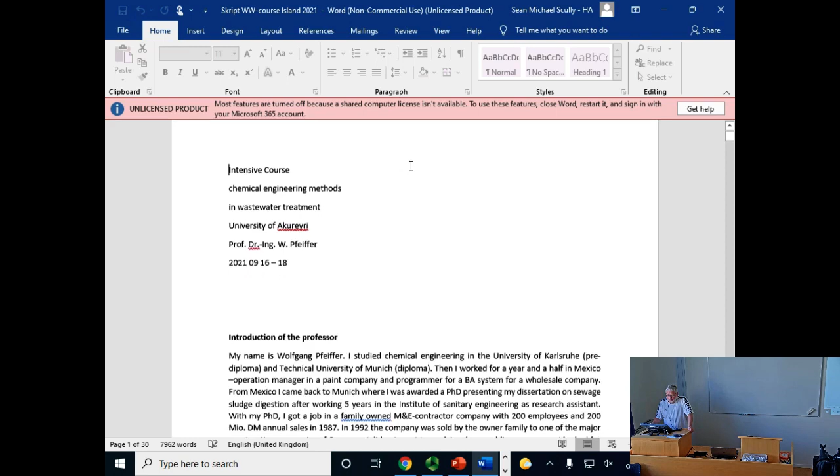Ladies and gentlemen, then I'd like to welcome you to the intensive course on wastewater and wastewater treatment and the connection to chemical engineering.

My name is Wolfgang Pfeiffer. I studied chemical engineering in the University of Karlsruhe. There I made my pre-diploma, and then I finished my undergraduate studies at the Technical University in Munich, where I made my diploma.

After that, I worked a year and a half in Mexico. I did different things there. I was operation manager in a paint company and later programmer for a business administration system for a small wholesale company that managed a wide variety of products.

That was still the time when you chased every byte, and you had to point your pointer on the screen and direct it all. A 5 megabyte fixed disk was our big pride, and it was a 100K central CPU, and 4 people could work on it, and it was only Business Basic. It was long before Windows was invented, so that was a totally different time, back in the 1980s.

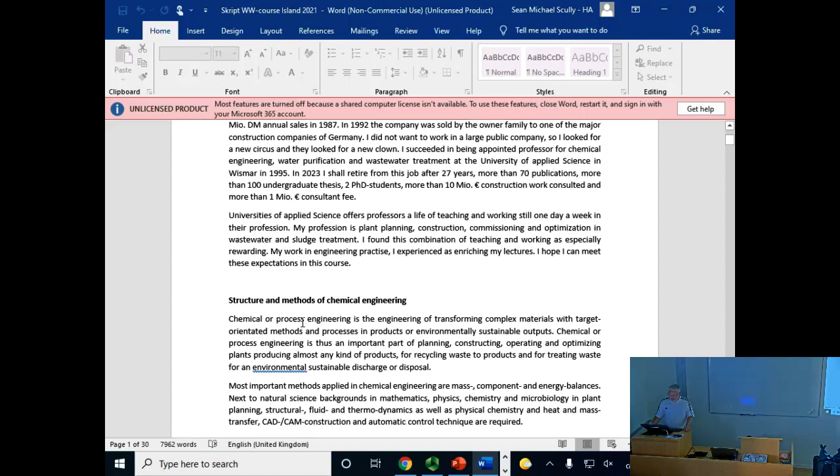So let me just try to change to the other file. Yeah, I guess it works easy.

Text is in German. I'm going to present you 2 or 3 different projects I did. The first one has to deal with a hair cosmetics producer. It was a company Goldwell, which then was bought by the Japanese company Kao.

And that was done still when I was working at the M&E contractor close to Frankfurt. Then I will talk about the development of a very small and very cost-effective DAF, as a pressure DAF, dissolved air flotation plant. I will present that, and last but not least, I will present a project of planning and then constructing a biological treatment of wastewater from a milk company with an SBR process.

So here you see the wastewater from the hair cosmetic company, and here you see the effluent, and in the back you see the solid waste from the filter press, what we saved. But you'll see this in a better picture later.

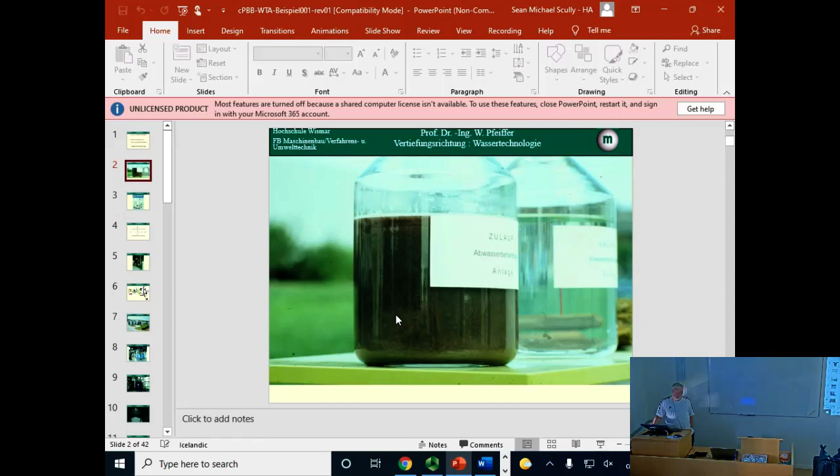We couldn't reach that with DAF, so we had to think something up. And just for playing around, because when you recall and you see this, you would not expect to get anything done with UV light treating this wastewater, which is thick in solids and color. So UV light is not going to penetrate very much through this wastewater.

So just playing around, we used this unit, and my chemist in my laboratory developed this process. He said, yes, if you treat this for 3 hours, you get a result. And the color is changed to a sand color, it gets a lot lighter, and the smell changes. I don't know what happens, but something happens.

And then after 3 hours, if I treat it conventionally with ferric chloride solution, lime, and flocculant, I get clear water, and the sludge I get looks pretty nice.

So I said, okay, try this on 10 different wastewaters, because in an industrial company producing hair cosmetics, shampoo, hair fixer, and all kinds of different products, they wouldn't give us the recipes - that was their production secret. And even if they gave it to me, they work with more than 200 different chemicals. So what knowledge does it give me if they give me a list of 200 chemicals in all kinds of combinations? What can I deduce from that?

I can deduce nothing. So this is one of the bases of chemical engineering - it's a very experimentally oriented engineering science. You just have to experiment. You don't really know what happened, but you see if different combinations work, and sometimes you have to say, okay, we found a way. We don't even know if it can be scaled up, and the upscale is really the core job of a chemical engineer. That's what I studied, and that's what I did all my life, more or less.

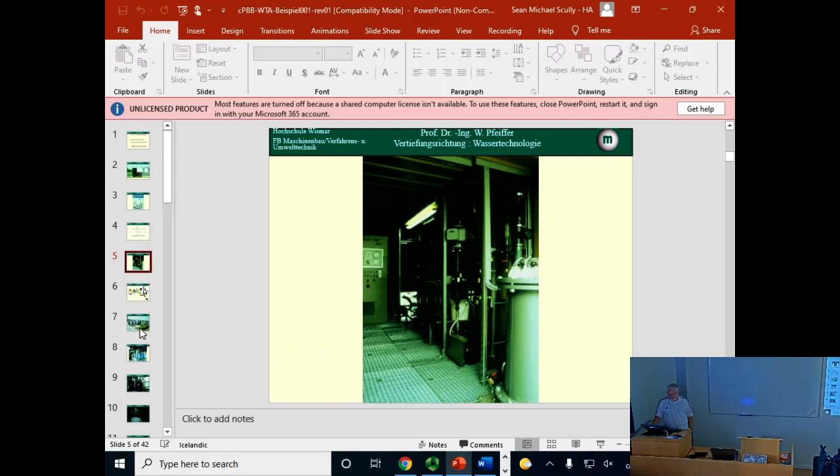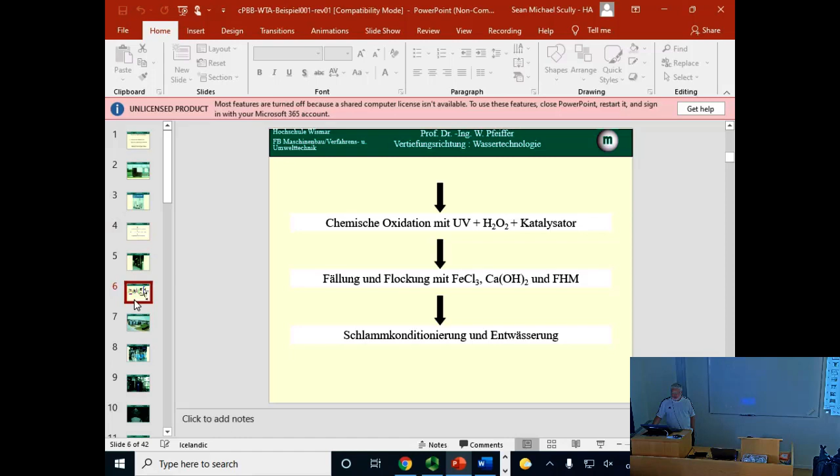Well, if you do that to a plant, you have to say, well, the wastewater comes, normally I have to store it. So what kind of process do you have? Do you have a continuous process? Do you have a semi-continuous process? Do you have a batch process? Well, due to that, we didn't really know how this central unit worked.

We decided for a semi-continuous process. So we would always have an alternating equalization tank. One day we would fill one tank, the next day we would empty it by treating it through the plant, and fill the other tank - alternating every day one tank, because this had to do with the dosing.

The pH, and what catalyst and how much catalyst we could try in the first batches, and whenever it ran, we knew that for this tank, this was the recipe for dosing the chemicals, the pH, and the amount of hydrogen peroxide. Then the plant could run all day and all night and finish up the wastewater of this tank. Next morning you had to see if it was the same.

Later it turned out, because the more experience you gained with the process, we had pretty much standard programs, and only a few days there were problems and you had to change the dosage.

After this radical oxidation process, we had this flocculant tank. We had 4 streets of this in parallel, 2 lanes of flocculation tanks. After the flocculation, sometimes the sludge floated, sometimes it sedimented. So we put a sensor for turbidity - whenever it was turbid, it would go to the sludge treatment; whenever it was transparent, it would go to a final filtration to get out the few flocks still in there, and then it was discharged.

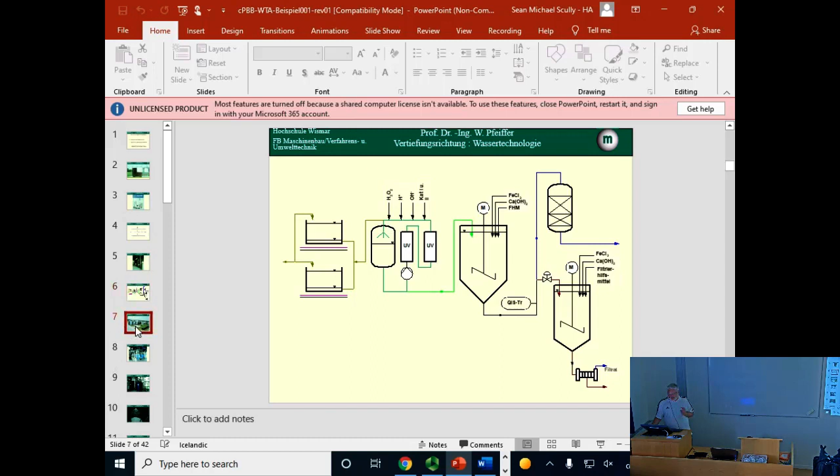There's a lot of history about what happens when you build such a plant. One day, they were already constructing it - the civil construction was all done, and they were just putting all the housings in. Then we made a last test, and we ended up purely in foam. It just foamed, and we couldn't control the process anymore.

So we tried and we tried for two weeks, and we were just standing in foam. We went back to the lab scale.

Also, when we started to get from the bench scale into the pilot scale, my chemist from the laboratory came back and said the process doesn't work. We tried 100 liters or 300 liters, and after 5 hours we didn't see any difference with this oxidation process. So finally I had to spend a weekend in the company, because they were so frustrated they wouldn't go back next Monday.

So I went there and said, you have to get something done over the weekend. I started, because they refused to start with only 50 liters. They're just playing around in the kindergarten, because the process will never be feasible then.

So I went there. I started with 50 liters, and I got it, and something happened. 50 liters was already a scale-up factor of 20 more—20 times the wastewater on the UV light in comparison to what we did in the lab scale. So that was a pretty nice factor.

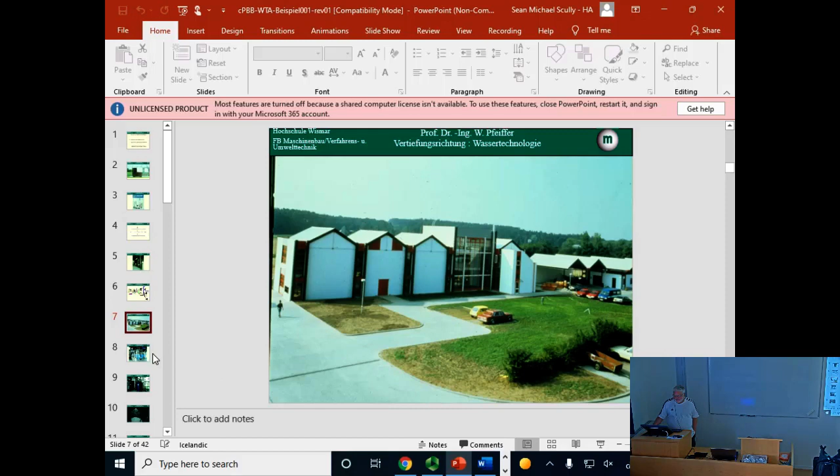Because in the real wastewater, you have some solids, you have some hairs, you have everything. So you have to have filters and pumps, and then you have to control the filters with pressure loss, differential pressure controls, and so on. That makes the plant a little bit more complicated. So the P&I scheme at the end was 8 DIN A0 pages for the entire plant. So there was built a lot of stuff, no.

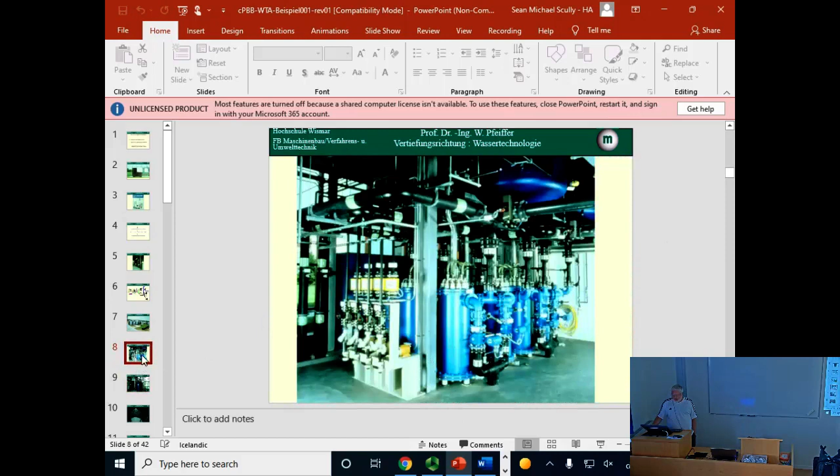This is the reactors now on the first floor. Below the reactors are the UV reactors. Then you have here - we had to spray it because this is how we control the foam, because when you start the reaction of course it foams, so just by simply showering we were able to control it. The reactor had of course a 5 cubic meter volume, so it had about 2 cubic meters for foam.

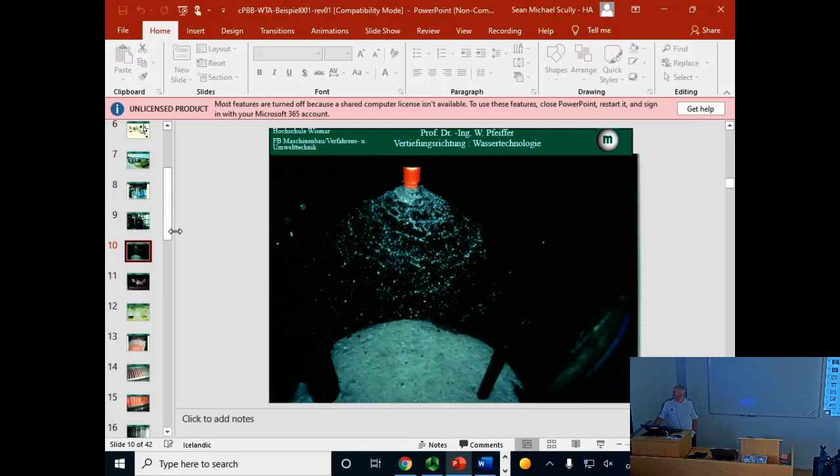Okay, this is now ground floor, sorry. This is the ground floor. You see back here the reactors. This was for lime, making the lime milk station, which is also something a little bit complicated. This was ash from an incineration plant for giving the sludge a better structure. And the sludge really was used in a brick company for making clay bricks.

This is where the sludge conditioning was. This was where the sedimentation was. Above where I'm standing here and making the picture is the filter press, and behind me is just the different storage tanks for the chemicals - for ferrous chloride, for hydrochloric acid, sodium hydroxide solution, and of course our nice little 30 cubic meter tank for hydrogen peroxide.

That's temperature controlled, and the temperature control has a direct connection to the fire brigade department. So if that heats up, then they all come. Unfortunately, it never happened, as far as I know.

This is a control room, and then it's a social building here. This floor actually had a price of 800 German marks per square meter. The Hyatt Hotel was built at the same time. They had only a floor for 750 German marks per square meter.

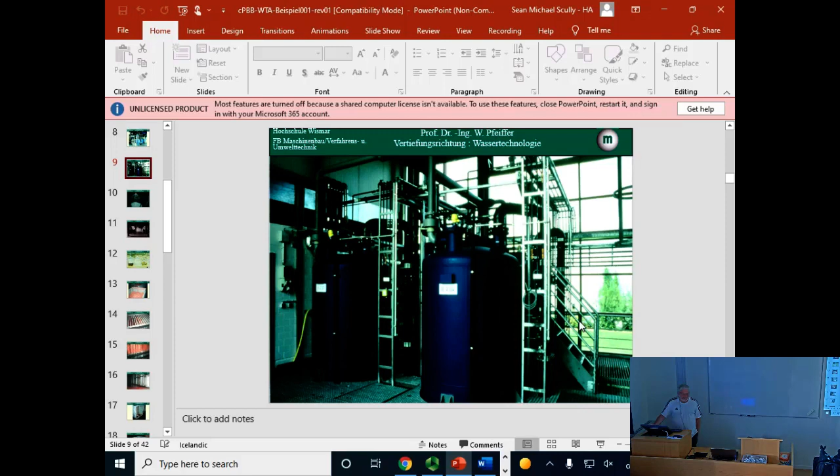Okay, and this was at the end. This is wastewater, this is water. It doesn't only look clear - it has a COD of, I think, 200 or 300, and the fats, also soluble fats, were below 60. And this is a sludge cake that went to the brick company.

It was okay from operation cost. Investment was high. I think they - I don't know what they did, but I think they are not using it anymore. They stopped it after 20 years. They changed.

I don't know, I haven't been there. My son is now studying in Darmstadt. I've been in Darmstadt 2 times, but I have not made it out to the company. I kind of want to look at what is with the plant, if it still exists or not.

Okay, the second one is for pet food pre-products. This is basically meat that comes out of slaughterhouses or packing houses, and this is meat that is good for human consumption, as you could sell it, but you can't sell it because no one is going to buy it.

No, it's intestines, sorry. Is this what we would call pink slime in the U.S., like the scraps off the bone that you treat with hydroxide? That kind of stuff? No, not really. It's good, you can sell it.

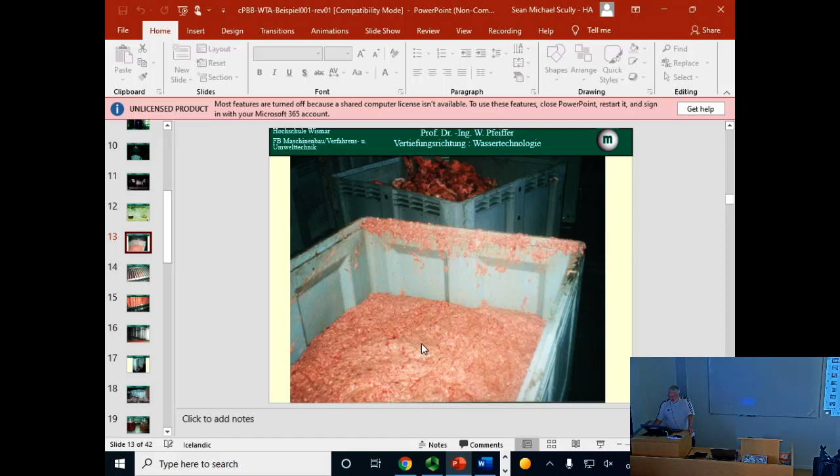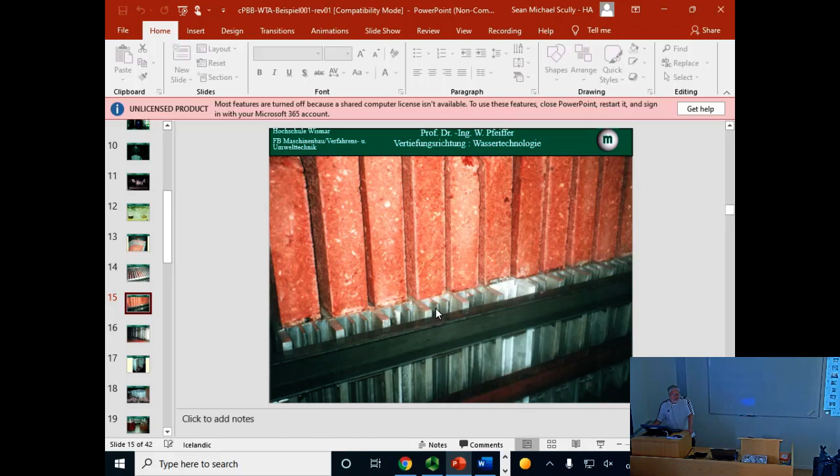Well, probably things have to change anyway. This might even become a prized product. Later they freeze it, and these frozen plates they send to the pet food companies. And they just can it up and sell it.

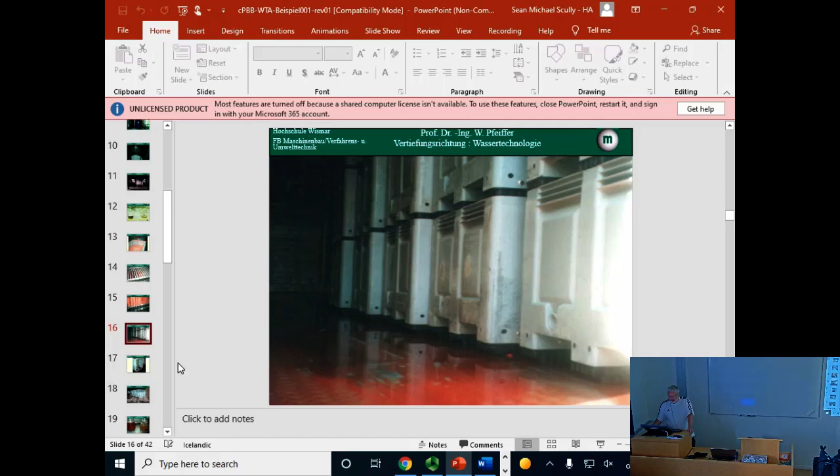And when the stuff from the slaughterhouse comes in the truck, you of course have here blood water, and when you have those boxes you have to clean, and sometimes from chicken stuff, or they sometimes get sent here fish stuff too, because they also make coats for nerds.

With COVID they had to kill all the minks in Denmark. It's those little animals, minks, yeah. Okay, sorry, minks, you're right.

This guy who operated this plant used to have mink farms also, and he said you can see everything of the process here. When I asked him, he said there are just 5 or 6 producers of that kind of stuff, and Chappie and all those big companies are not going to buy from anybody else because they trust their know-how.

Meanwhile, by operating biogas plants, I also learned that you have to add trace metals to a biogas plant if you operate it only on energy plants. In sewage sludge and in manure, you don't have any problems, you have all those trace elements. But if you work only with energy crops, you have a problem, you have to add that.

Also, which I was surprised by, when you work with food. As we built one biogas plant recently for a guy who cleans the inside of trucks which transport food on the road, no, milk, chocolate, oils, and all this kind of stuff. And they have to go to cleaning, they get cleaned, and the wastewater, he pre-cleans them.

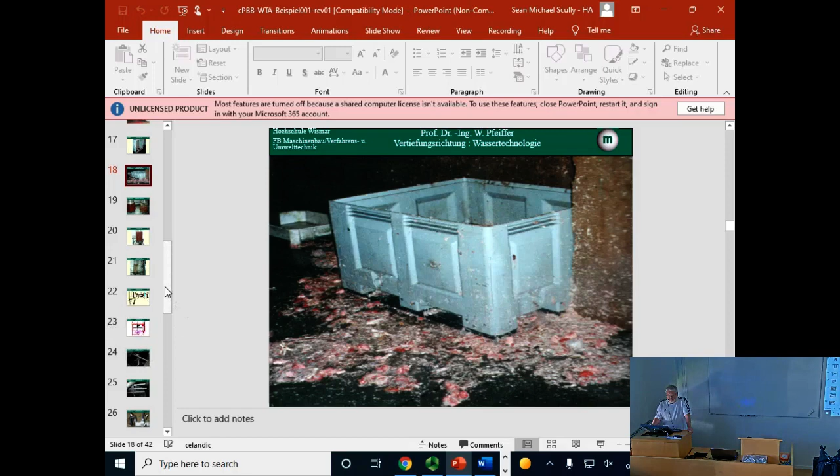And so they said they will only trust people that have experience with that. Just out of curiosity, with respect to the trace elements, do you guys happen to go to the bother of identifying which trace elements you actually need to add, or just perhaps throw the kitchen sink at it?

I know, sometimes it's good if you know someone who knows. And for me, it's Dr. Lindorfer, because he is from Austria and he made his PhD on trace elements. I have his PhD thesis, I looked into it, and he has found out what the limits are. He works for the Schaumann Company, which I think was founded in 1907 or whatsoever. They have over 100 years of experience, they sold this always to farmers, and now they are the leading one of 2 or 3 suppliers we have in Germany that send these micronutrients and trace element mixtures to biogas plants.

With him, I just suggest that to my clients, and that's it. So they have one source, they can buy it, and he helps me when I make my pilot studies and all this kind of stuff.

Okay, this is the wastewater that they have. And this is what it looks like after you add iron, because blood you can really flocculate very easily with iron salt and keep the pH around neutral. And then again I send a student there, because this is also an experiment that we show our students. This is our DAF unit.

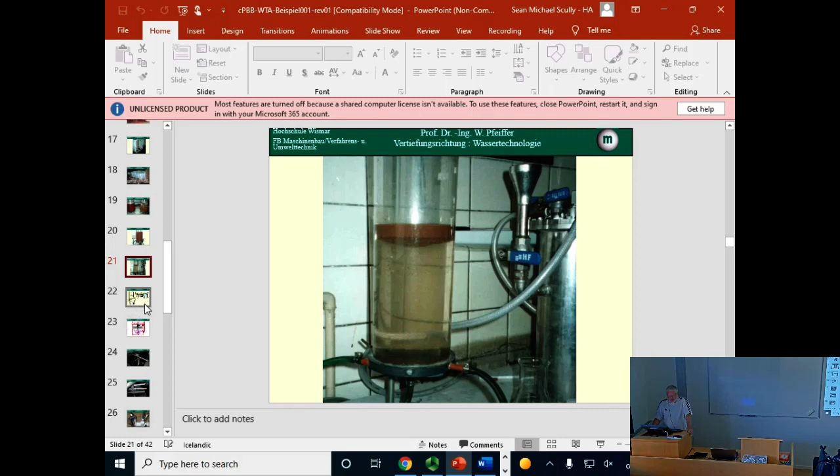Okay, this again is a process scheme, a little bit more now with elements. We have here an equalization tank with sedimentation of the coarse stuff. This is what you've seen here - you don't want to have this in your plant, so you just have it sedimented.

Then from here you have a pumping station. The pumping station goes into the big equalization tank because they only had 15 to 20 cubic meters a day, so they just run the plant for 4 hours a day. They do their day's work, and when they're done, they just press a button when the tank is a little bit filled - or it might even be automated so when it's filled it starts itself, and you can also start it manually when you finish your work to empty the tank for the next day.

Then you have an eccentric pump here, kind of a screw pump, a mono pump. That is for getting controlled flow, because the flow is proportional to the revolutions the pump has.

Then we add the ferric chloride, then we adjust the pH to neutral again, and then we add our flocculant in the flocculation tank. And from the flocculation tank, you go into this DAF unit, which I will describe a little bit because it's the heart of it.

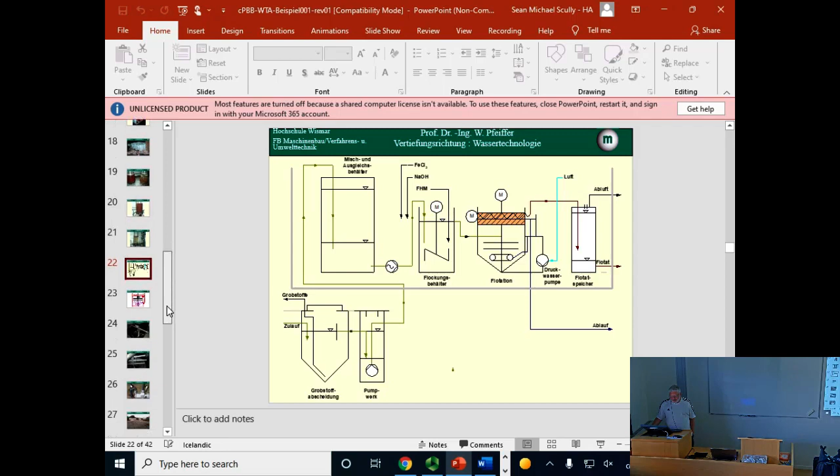So we started at the porch of my house. We started to make a float DAF because he has never seen a DAF. So we made a small DAF on the porch of my house with an IBC tank, playing around there, giving different ideas. And then I had a very good student. He did in his bachelor thesis, at that time still a diploma thesis, he had 3 different projects.

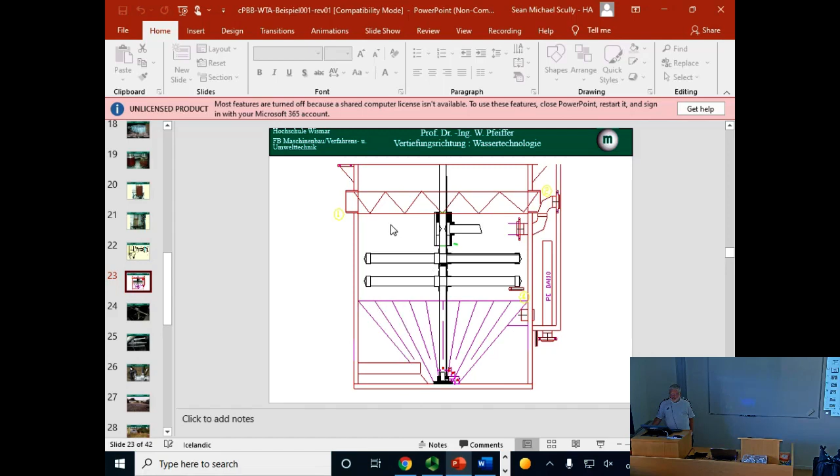One of them was to help us with this DAF unit. So what we did, we bought a PE plastic tank, already with a cone inside. That cost us, I think, €3,500. Wasn't really expensive, because it wasn't big. It was like 2 meters in diameter, 250 in height or something.

And then the real thing was how to get the sludge away. So we just put a screw, a conveyor screw, in a pipe, and we just opened the pipe on top of it. And then what we did, it was windshield wipers from trucks. We put this construction here that was turned around. There was just one motor on top of it, turning all this, what you see here in black, turning it around. And this was the inflow here, and we had also for static, and we had 2 holes here, so the inflow could always work in this little chamber.

This was isolated with O-rings. And then in this main column, we entered the wastewater here, and from the bottom, we entered through a block, and through the block, we pumped in the pressurized water, and the wastewater would go out here through these ones. They were a little bit at an angle, so the wastewater would be released first, and the pressure water would follow. So the pressure water would then go under the flocks, put the wastewater up here.

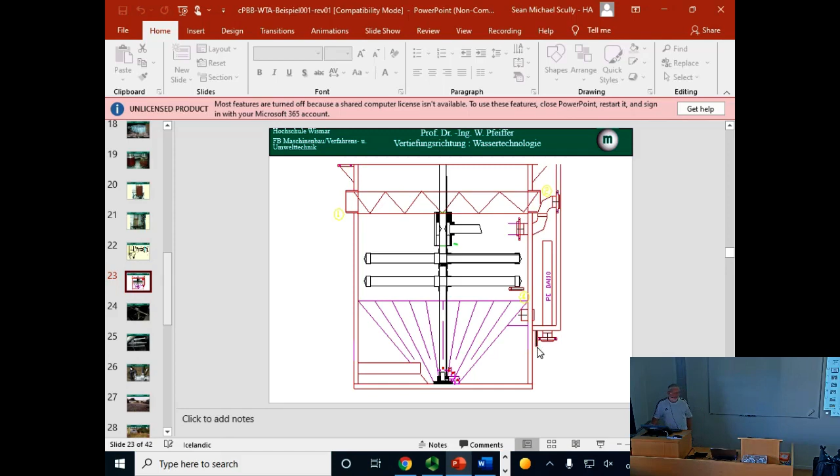And the wastewater would be collected underneath here, go into this chamber. And this chamber had an overflow where the effluent was, and this was the overflow here, and also from this small connection here was going to supply the pressurized water. Okay, now in concrete you see this here.

This was a construction. All this material is standard from a company called GF. It costs us, I think, €500. All this you can just... this is another. All the steel work and the motor is maybe €2,000, and this really was a little bit eccentric.

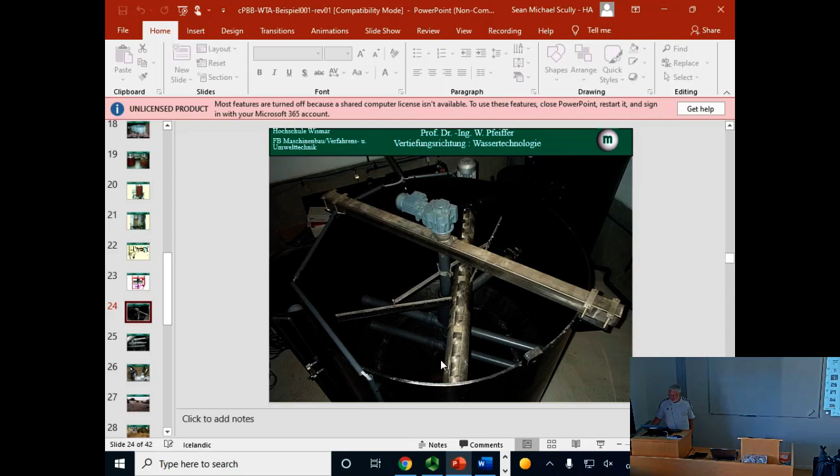These are the sludge collector, the conveyor, spiral, and this was the windshield wipers from the trucks. This would be turning around here. Here you see the 2 different distributors. Let me see if I have anything else here.

The hardest work was for the poor guy who had to weld all those half-cut plastic pipes here in this cone, because this is welding there, and sitting in a cone is not really very comfortable, to be honest. And this was the pressurized water going to the central block. This is where the inflow comes into this connector, and this was blind flanged here, so the water could just get out through those holes here, and the pressurized water would go out through these holes, which you see here.

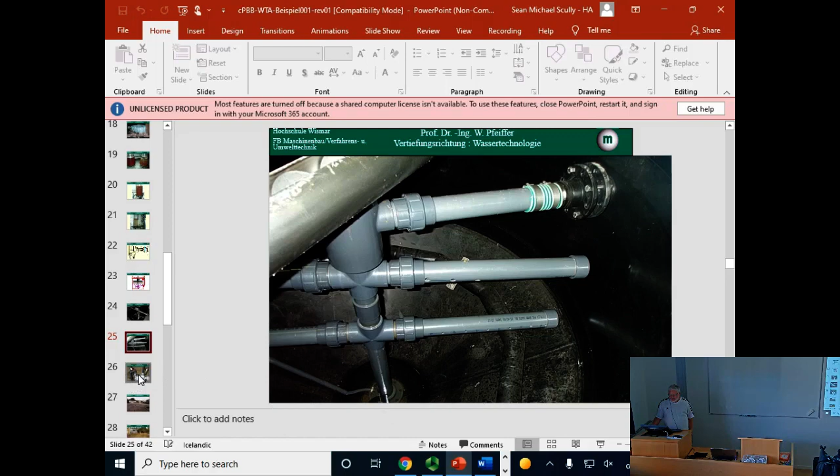So the whole thing did just cost €35,000, and the project was very profitable. Because the standard solution, what other suppliers offer, if you just buy the naked flotator or flotation equipment, you're at 150 to 180,000 euros, and to reduce that to 35, that left a little bit money for everybody.

This is a pump that is a 2-phase pump, and that is where you mix water and air and compress it to 4 bars. This is where the air is sucked in and the water comes. I don't really know, this might be the inflow, and this might be the air connection somewhere here. At least that's from Kiel and Edur pump.

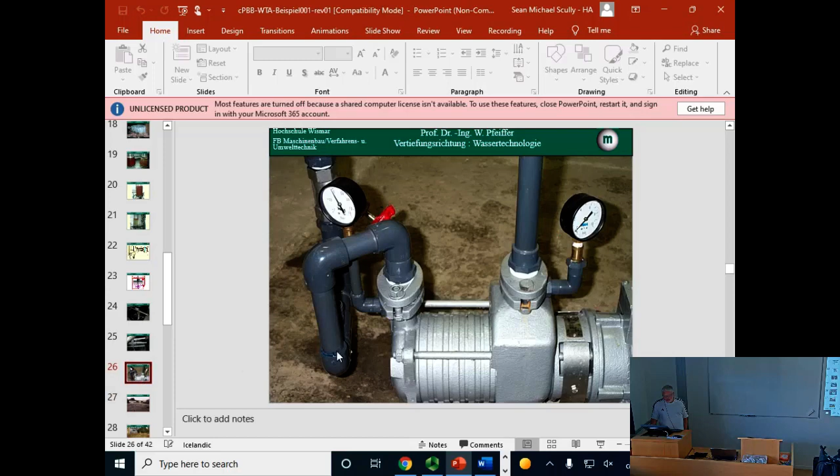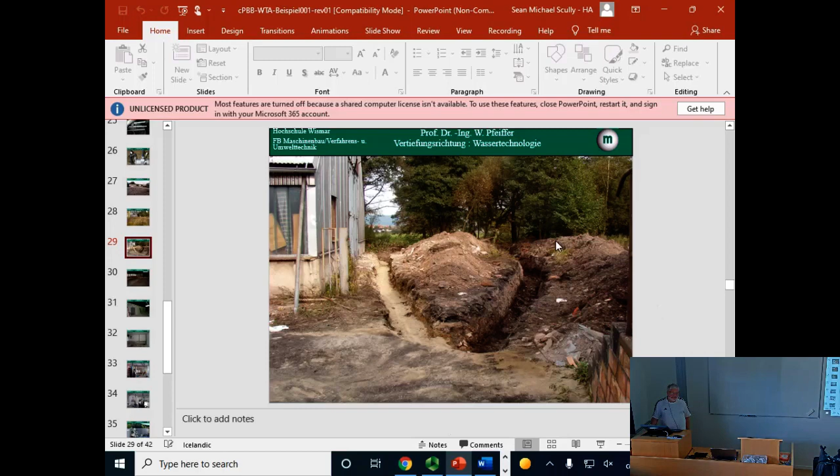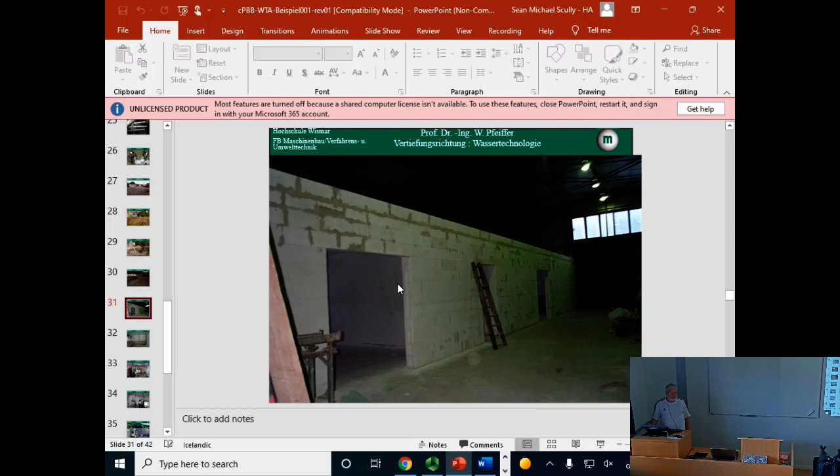Then you come into the building. There were milk cans here, so we cleaned out the milk cans, and I chose this to be my operation building. That was, of course, very cost effective - just putting in a few walls, putting a wooden roof on it, and putting the milk cans on top of the wooden roof, and everything was in order again.

Then we had here something I wouldn't ever do again: make underground constructions in an operation building. It's a little bit dangerous. Not really, because the volumes are very small, but you can generate explosive or toxic gases. It's better to make it outside. That wasn't really a good idea - probably one of the things I didn't do a very good job on here.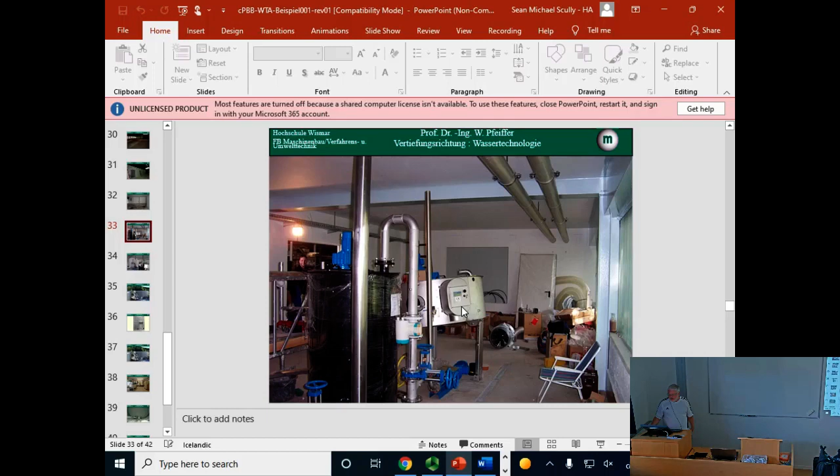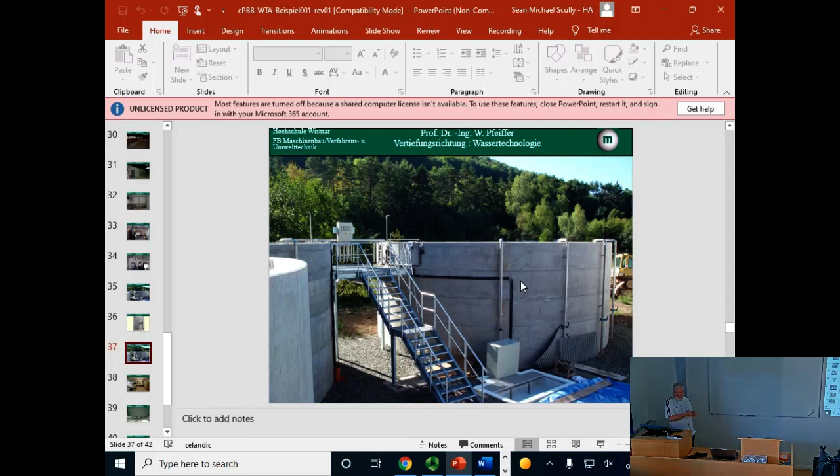These are the two SBR tanks. An SBR process has different phases - what we'll talk about on Friday: biophosphorus removal, denitrification, nitrification, and sedimentation for separating the activated sludge from the treated wastewater, all done in just one tank, on a time scale. You have two options: do it for each unit with a different tank, running time-wise in parallel but in different tanks, or do it all in one tank, separating it by time with different phases.

Okay, this is when it's fully equipped here. This is the influent, and it either goes to an equalization tank or to an emergency tank. And this is a pump that pumps it back from the emergency tank into the inflow.

Whenever the wastewater is getting a critical composition, pH, temperature, or concentration, then you can just pump it into an emergency tank, because if it has an unusual composition, something has happened - maybe they lost some acid or base, or a milk tank lost a couple cubic meters of milk or cream. Then you can store this in an emergency tank and pump it with a small pumping rate into the wastewater stream, especially if the wastewater is not very concentrated at that time. Then you can dispose of those hazardous wastewaters, because the components in there aren't different, it's just a concentration issue. If you have different components, of course, you have to think about different ways.

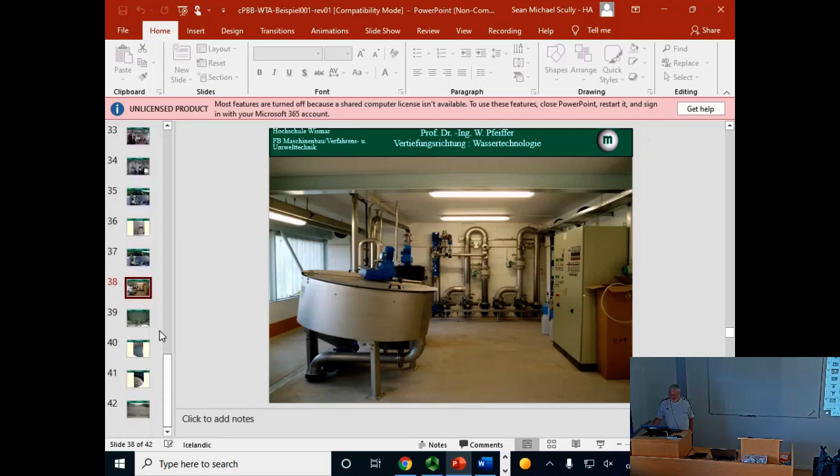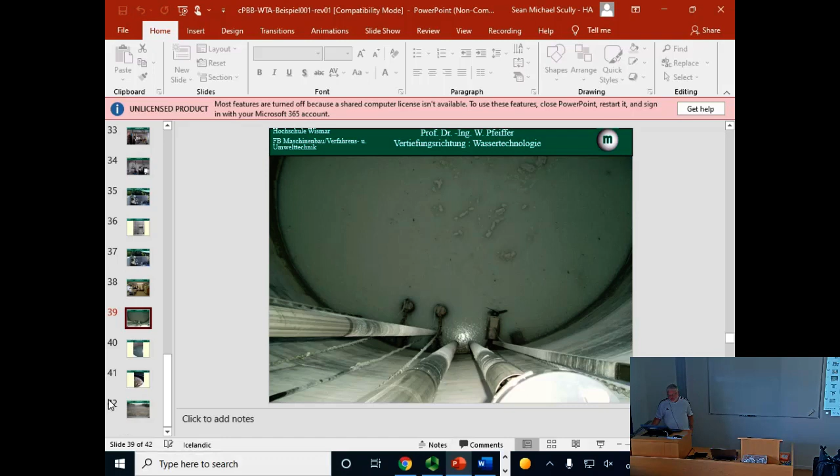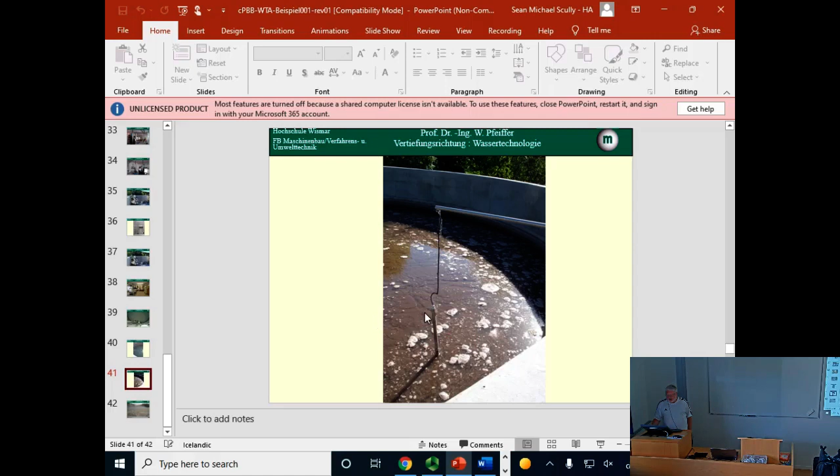This is an oxygen pH meter, because this is the equalization tank here, and this is the aeration tank where you see the activated sludge. This is the dissolved oxygen DO meter, dissolved oxygen concentrations. You see in those things that it's flocculating very well, because you see those clear water traces there - it separates nicely. This is when it's aerating in the aeration phase, with fine bubble aeration distributed over the ground floor.

That's a little introduction to what I've been doing. Lately we've had a couple of breweries we had to consult - nice job, we love that. I still have some jobs in the milk industry, right now mostly a Bavarian milk industry, working on their flotation sludge discharge.

We're going to build a 4.2 megawatt biogas plant there, to process their permeate, molasses from the lactose production side product, and flotation sludge - mostly to become independent of the waste disposal companies, because they just eat you up. They ask 55 euros per ton for flotation sludge, and right now we're hauling that to the next sewage treatment plant, paying 18 euros for transport, and we're finding a new transport for 11 euros.

So the entire cost goes down from 1.1 million a year, because it was 20,000 tons at that place, to maybe a couple hundred thousand. It's better giving the money to the farmers than to the solid waste disposal companies. And with this 4.2 megawatt plant, since right now all the steam furnaces run on natural gas, we can substitute almost 90% of the natural gas with biogas. That's also a contribution to climate protection, because we're talking about 700 cubic meters of biogas an hour - some tons of it. Okay, any questions about this?

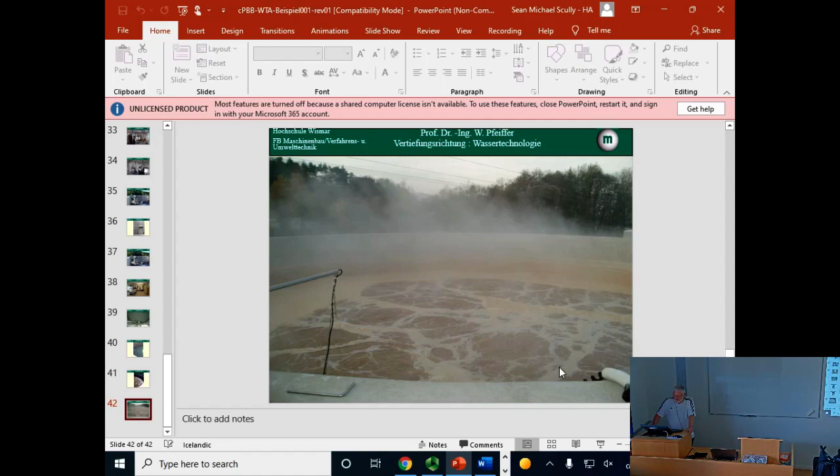Okay. Now this is...

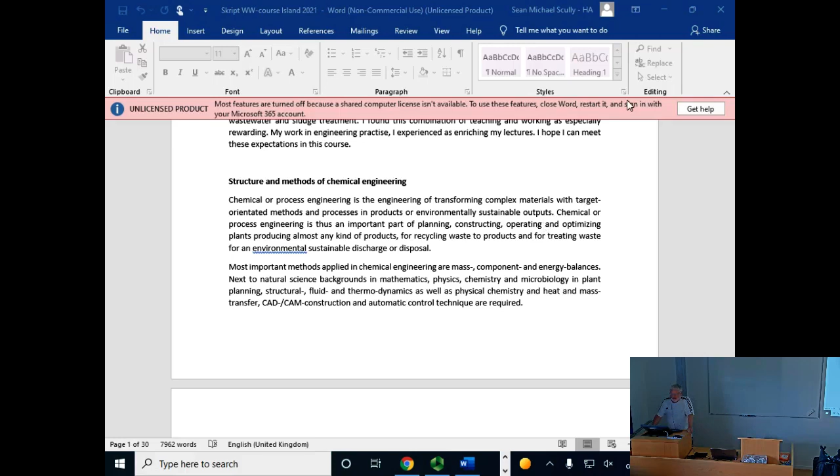Oh okay, so you might have read it. It's a little tricky because I didn't know what people I'd face here, and probably everybody here has nothing in mind but ending up on a wastewater treatment plant. If they would have told me that when I was a student, I'd have said you guys are crazy. Ending up at a wastewater treatment plant, I really find it challenging, because in the morning you're in a bakery company, at midday you might be in an automobile company, and at night, if you're lucky, you're in a brewery company doing your job there.

Because everybody is working with water, and if you work with water, you have wastewater. So it's probably the product that's moved more than anything else in all companies. There are only very few companies that move anything else, or any other chemical, more than water.

So it's really interesting for a process engineer to come to all those different companies which do different things, and they all have to disclose much of their production. That's kind of interesting, to see how they produce and what they produce, because normally they don't look at the wastewater.

I also once had to do something in a huge, pretty big bread company. They make about 9,000 tons of bread a month or something, for all of north Germany more or less. This is golden toast, and I think they do a lot of that stuff.

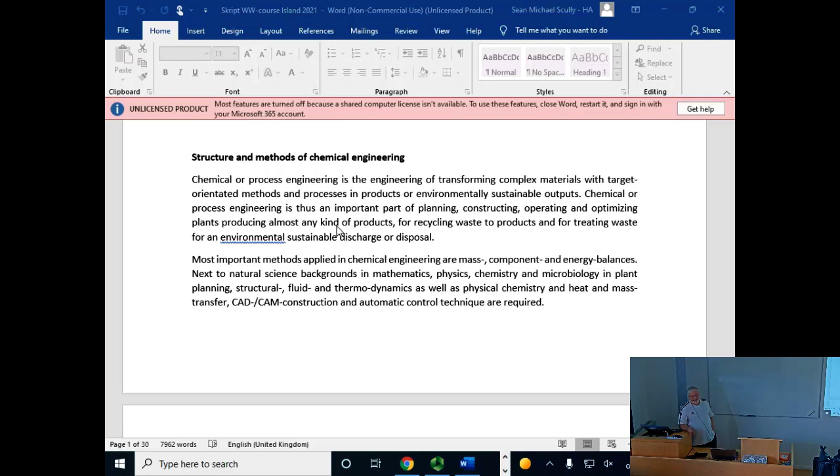And I swear I'm not going to ever put a foot in this wastewater treatment plant. They were a little bit surprised. No? And I said, 'Hey, I'm a professor. I'm not operating a sewage treatment plant. My laboratory is going to be on the sewage treatment plant because there I have every media I need to experiment, and there they take me seriously. I'm not going to operate here. In summer, no students. In winter, there I just get urine. I can't work here. No, that's nothing. Nothing. That's for playing around and not for serious people.' No, okay. My laboratory is on the sewage treatment plant.

Wasn't easy, no? Because they told me it wasn't possible, and I said, okay, we'll get it done. No? And nobody wanted it, but I had to talk to the prime minister of our state, and finally I got it done. With the help of a few other people that thought it was a good idea. But it wasn't easy, but finally we got it done, and I'm happy with it now. We moved one sedimentation tank a little bit closer together, so I got my 400 square meters for my laboratory.

Well, I lost a little bit the thread. Where did we get from? Bread, yeah. And this is why you have to look into the production, no? And you can save there just any amount of money, and why you have to look at this co-work of experimental work and design, no? That really makes it, no?

And the other one, then we in Grevesmühlen, where there was this manager of that utility company, he once got an approach. They wanted to make biodiesel out of the sewer waste fat from grease traps. And it ended up that most of the waste from the grease traps ended up for co-digestion. And those guys that wanted to make biodiesel, they got into jail because of subvention fraud, you know? Because they took money and they never really produced biodiesel. I don't know if it wasn't that bad, but they were pretty well fined, and they had to go in for a certain time.

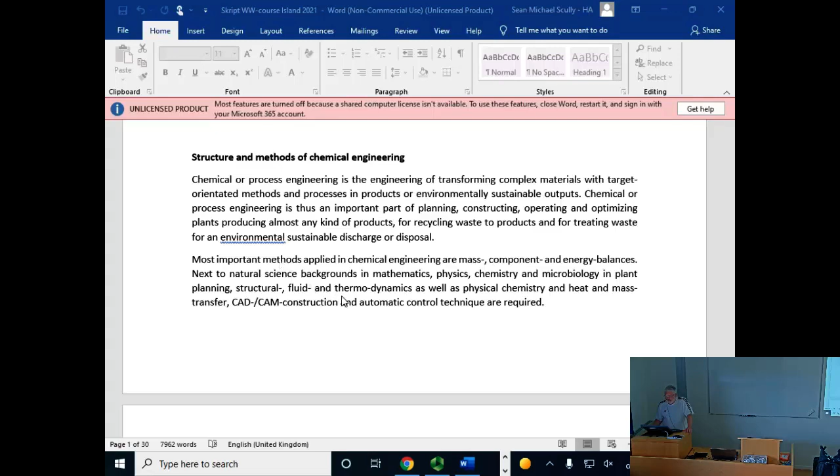Okay, now we shall move on to the world of process and plant engineering.

In Germany, we have almost a law called HOAI, the German word for Honorarordnung für Architekten und Ingenieure. Germans love the word Ordnung, that's regulation. Honorar means money, so it's a regulation for charging engineering and architectural services. This exists because public companies also have to give contracts to engineers and architects, and this regulates how they can pay them.

This is because at the time you give the contract, you don't even know what you will construct. You know you want to build a school, but you don't know how much it will cost or what it will look like. That's what this regulation is for. If it costs that much, normally you get anywhere between 10 and 15% of the total cost of the building, machinery and equipment. That's what you invest for planning.

This regulation also gives us a nice structure of how a consulting or planning process is organized. It's structured in 9 phases, and that's what we're going to follow here, though not through all 9 phases.

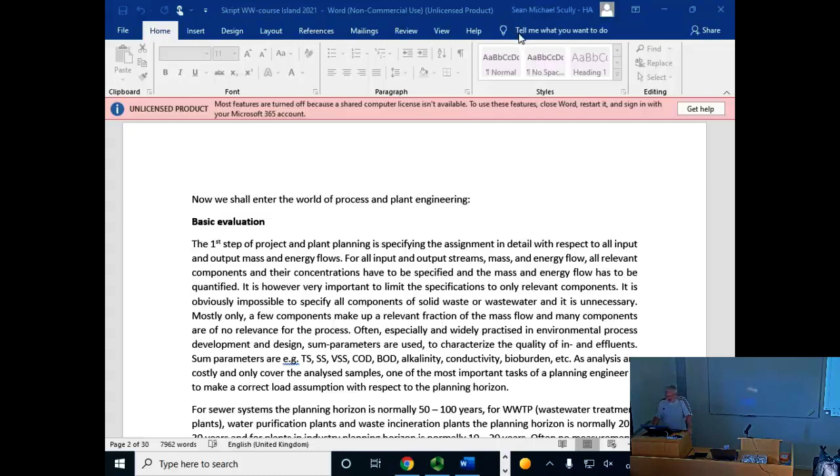So for sewer systems, I just said the planning horizon is 50 to 100 years. For wastewater treatment plants, water purification plants, and waste incineration plants, it's normally 20 to 30 years. For plants in industry, it's normally 10 to 20 years, although often they are deinstalled after a shorter period of time. Sometimes it lasts longer, so an average is maybe 10 to 20 years.

Often no measurement of the input loads is possible because you stand in front of a green field and can't measure anything there, since the plant is only being built, and at the same time you've got to build the wastewater treatment plant for it - simply because the data aren't available. The load assumptions are often the most insecure part of plant planning, especially in environmental plants like wastewater treatment plants or waste incineration plants.

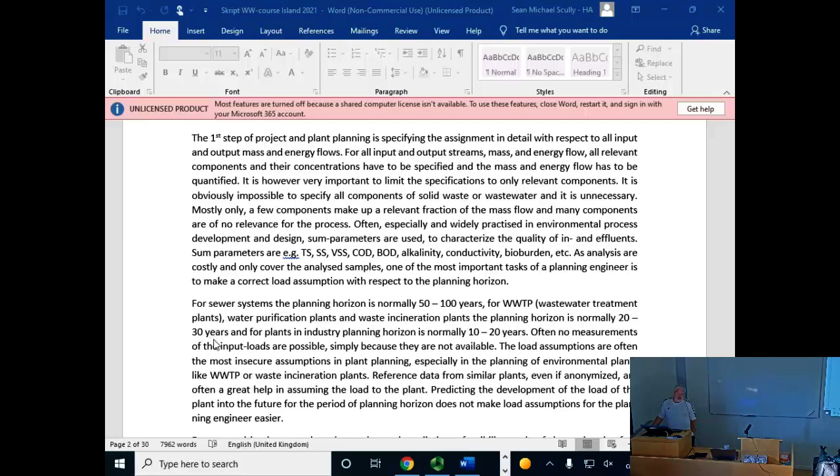Reference data from similar plants, even if anonymized, are often a great help in assuming the load for the plant. Predicting the development of the plant's load into the future, over the planning horizon, does not make load assumption any easier for planning engineers. So it's just difficult, and of course you have to discuss a lot with the people to find out what's possible. Since you're not in the bakery business, you've got to talk to the people - what do they expect?

What's safe? What's not safe? For a sound assumption, a thorough preliminary feasibility study of the project is often required. All stakeholders should be involved in the study and should agree to the result, which shall be the basis of the process development and design, if the draft process study proves the feasibility of the plant. Especially in planning environmental plants, it's most important to study thoroughly whether the load to the environmental plant can be avoided by optimization in the production processes. Because nobody can pay for a wastewater treatment plant to treat raw material - then you'd pay for the raw material three times: you pay for the raw material, pay for the treatment, and pay for the sludge treatment and disposal.

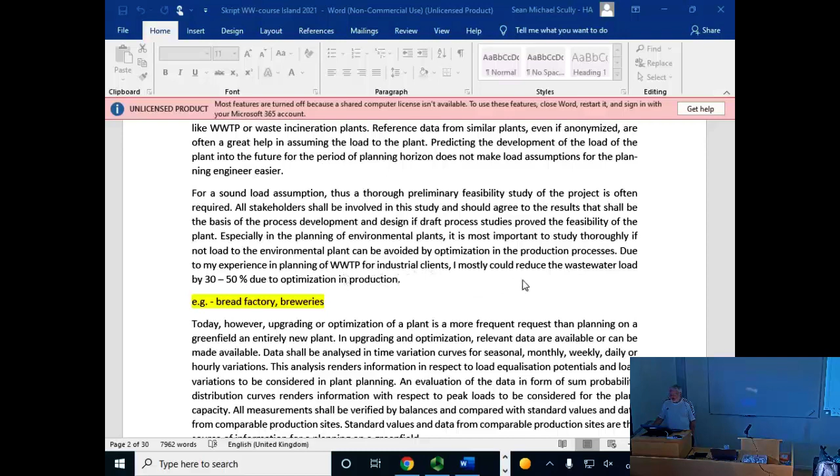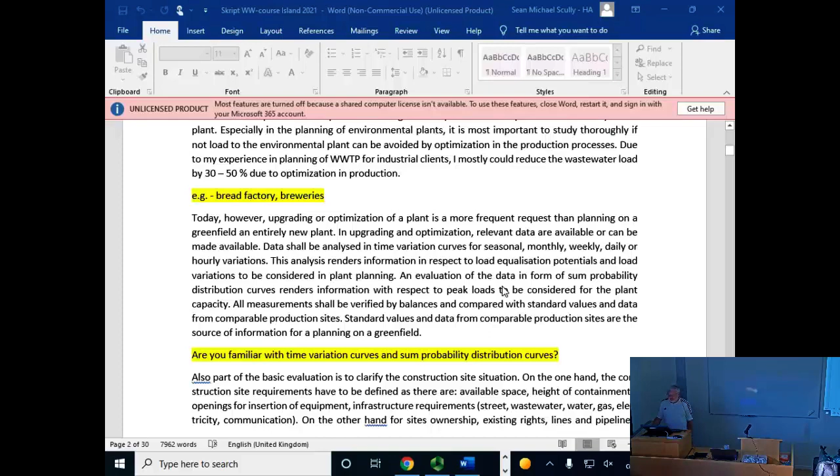No company is going to survive that. Due to my experience in planning wastewater treatment for industry, I mostly reduced the wastewater treatment load by 30 to 50% through optimization in production. That's normally what you find. I also told you about the bread and brewery examples I already mentioned - there's also an interesting approach - but now let's look at how to go about sizing, what to build.

When the people from Bayer bought a nearby biotech company, which I was involved in a little bit with wastewater problems, they said they're buying a new territory because they want to expand the production and R&D department. So they bought two lots next to the existing company, and we were doing all the planning of what we needed for expanding. We made a room book - what is in every room, how many rooms do we need, what size do those rooms have, what is the infrastructure, and so on.

Then the Bayer people came, looked at that and said, that's nice, but we're not interested in that right now. That comes later. What is allowed to construct on this lot? We are going to build what's allowed - 6 meters high, how close to the border can we get? That's the building we're going to construct. Then we're going to talk about what's inside.

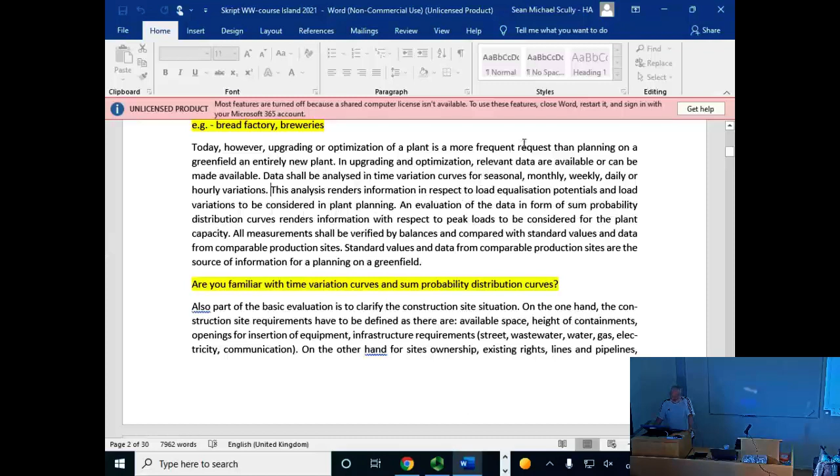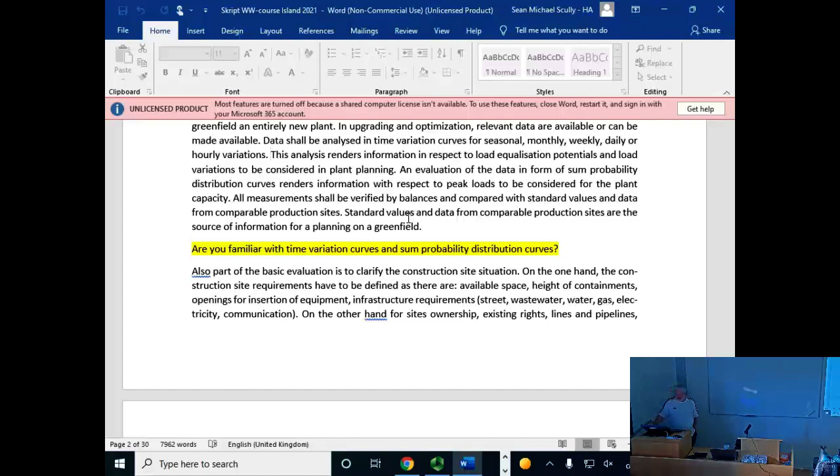Okay, now enough information generally on quantifying and specifying your assignment - what your job is, what you have to do, and how to qualify and quantify it by some parameters, data evaluation, time variation curves, and sum distribution curves.

Okay, the second part of basic evaluation is that you clarify the construction site situation. On the one hand, the construction site requirement has to be defined as available space, heights of the containment - that depends on your reactors - openings for insertion of equipment, infrastructure requirements: if you need a street, a train connection, a quay for ships, it depends.

Wastewater, water, gas, electricity, communication - you've got to find out if there are lines for these. So when the backhoe, the scoopy thing, the machine that digs up the earth, comes...

When he comes, you better know where the gas pipe is. Otherwise you're going to have a big hole and no backhoe, no construction machine anymore. The hole is there, but no construction machine anymore - you are in jail, because the operator doesn't exist anymore either. As with gas pipes, you better really know, and the same goes for not destroying existing pipes.

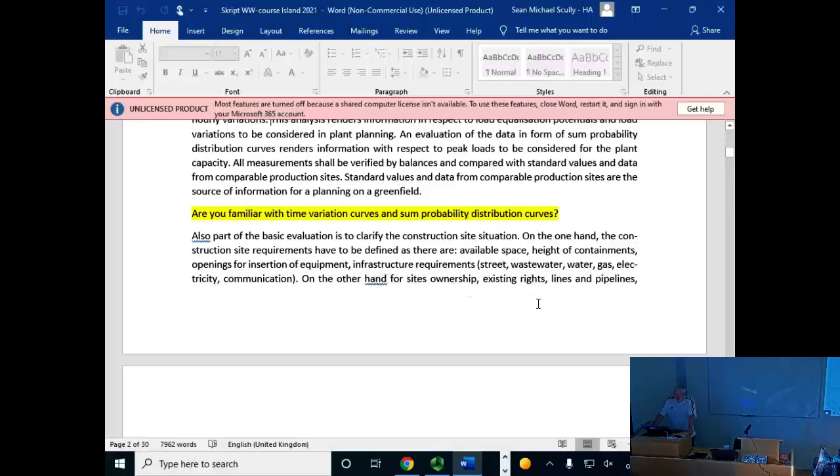On the other hand, for sites: ownership, existing rights of other people, lines, pipelines. Quality of building area, very explicit - the bearing capacity, what kind of foundation you need for construction, groundwater table, foundation requirements. This is all important.

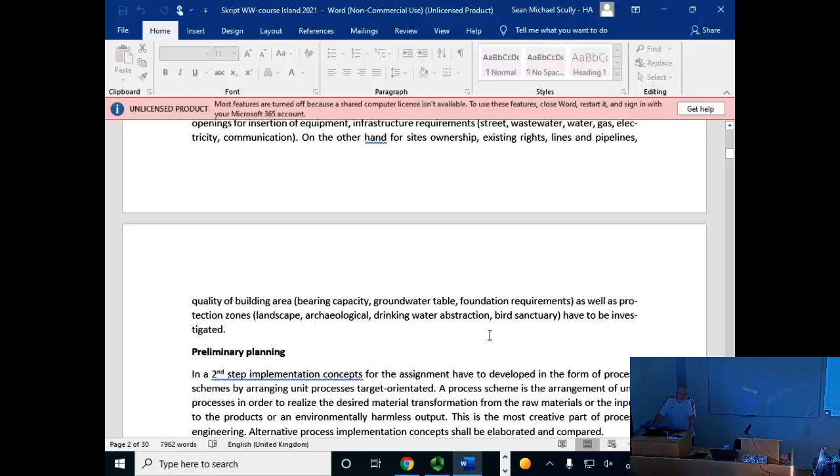This can considerably generate costs, as well as protection zones - landscape, archaeological, drinking water abstraction areas, sanctuaries, and everything else. Because you might plan it, but it doesn't help if you don't get permission later to construct it. Okay, that's all for basic evaluation, if there are no questions.

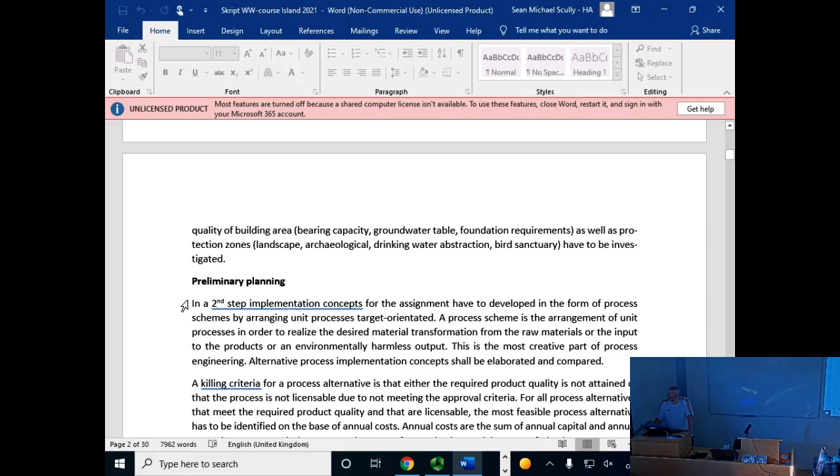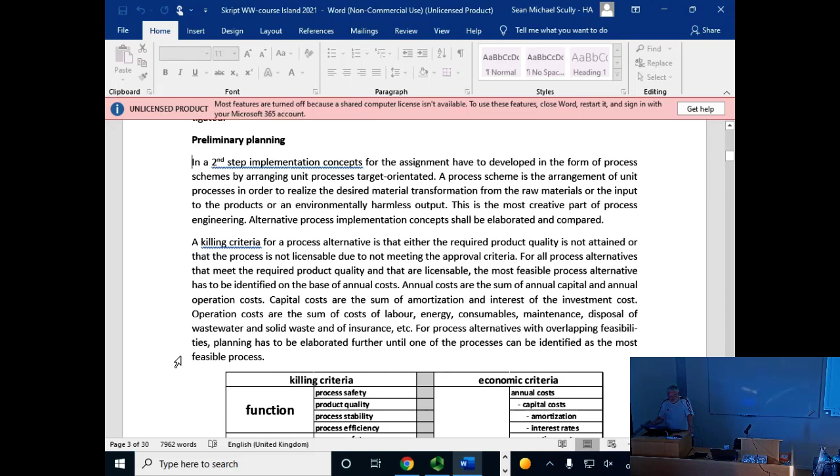I just would like to state that I'm really surprised that going back and optimizing existing processes is such a large factor here. Because by the time somebody actually comes to you to look at the wastewater side, wouldn't you think established personnel would already have taken advantage of those savings?

He says, no, I can hire external people for that, but they will not permit me any more engineers. We have 6 engineers in this entire company with 200 employees and 9,000 tons of bread a month. He said, I have 400,000 euro labor cost every month, and 4 million euro raw material cost. Now you can see what my engineers are doing.

First, we have to see that the raw material gets through with the least loss that we can have. And we didn't see this 100,000 against the 4 million - we didn't see the 100,000 in the wastewater. Of course, it's a lot of money every year. And then we have to get our labor force organized and get our products out. For the rest, we just don't have any capacity.

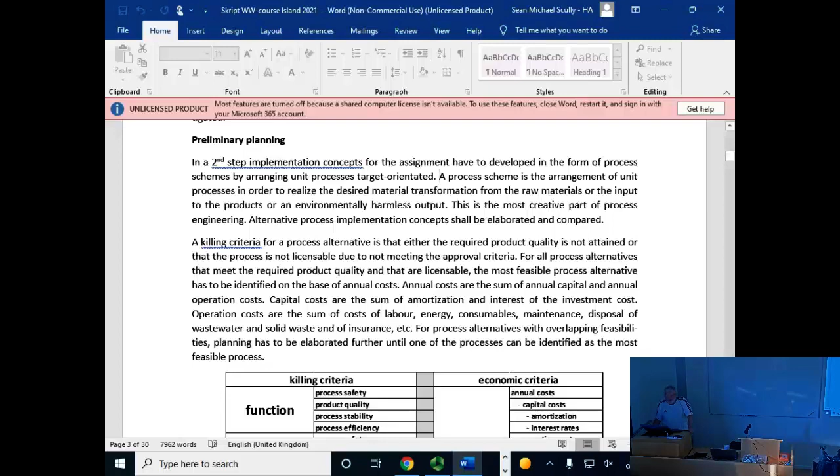The old Honda said there are no ideas which are worthless—it's just a task to find the right application for the idea. Okay, we don't want to go too much into philosophy here.

Killing criteria for a process alternative is that either the required product quality is not met, or that the process is not licensable. If you find that out, you can close that book—that's not an alternative. Any process has to meet the criteria for product quality and quantity, and it has to be licensable. If it's not licensable, you better don't build it, because they are going to close it down.

For all process alternatives that meet the required product quality and are licensable, the most feasible process alternative has to be identified on the basis of annual costs. There's almost no other criteria in process engineering.

This kind of interests my son who studies mechanical engineering. If you have a product construction or design, there's non-commercializable criteria, non-monetary criteria on it. Ergonomics, for example — how are you going to evaluate that? And that comes when you get to those boxes where you have all the criteria and values for evaluating the criteria, like this is double or twice as important as the other criteria.

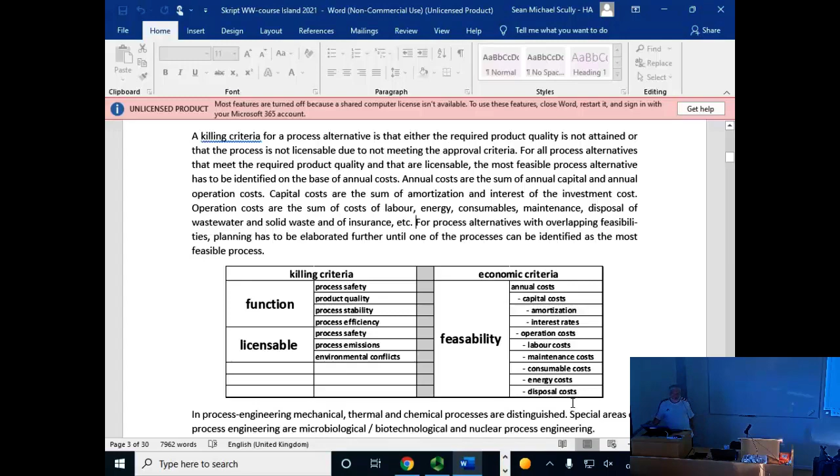Process engineering, that's what I told you. Mechanical, thermal, and chemical processes are distinguished. Special areas of process engineering are microbiological, biotechnology, or nuclear process engineering. Mechanical, as a process engineering, separates into mechanical engineering, thermal engineering, and chemical engineering. The mechanical engineering has to do with, it's even in German a hard word, in English even,

dispersivity. Anybody know what dispersivity means? It's a complicated word for two things. It means mechanical engineering has only to do with the distribution of one phase in another. That's probably solids in a fluid. A fluid might be gas or water. This is mostly what it is, no?

So dispersivity has to do with that. You can look it up in the dictionary, and it's going to tell you exactly. This has to do with one criteria, a concentration. I looked it up in Leo. Leo is the translator of the Technical University of Munich, because I wouldn't know how to translate it.

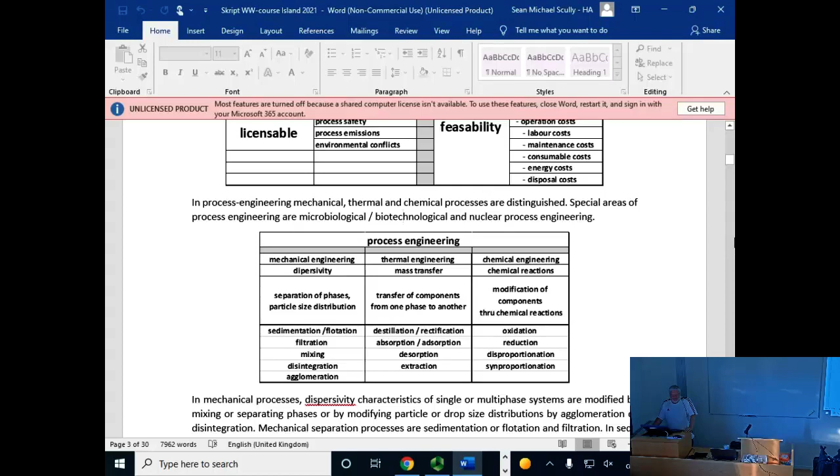So if you're using enzymes, you would put that under the chemical engineering part. It's like chemical reactions, whether they're biological or not, they go into there. Whenever the component is chemically changed, then we talk about chemical engineering. No matter who is the catalyst. If it's a living catalyst or a dead catalyst or no catalyst, for me as a crude chemical engineer, bugs are only catalysts. With the fourth box for biological, no.

In German, we have a saying: all good things are 3, and that's why I love to make things by 3. I think that's really true. 3 things you can memorize very well. So due to that, it makes sense.

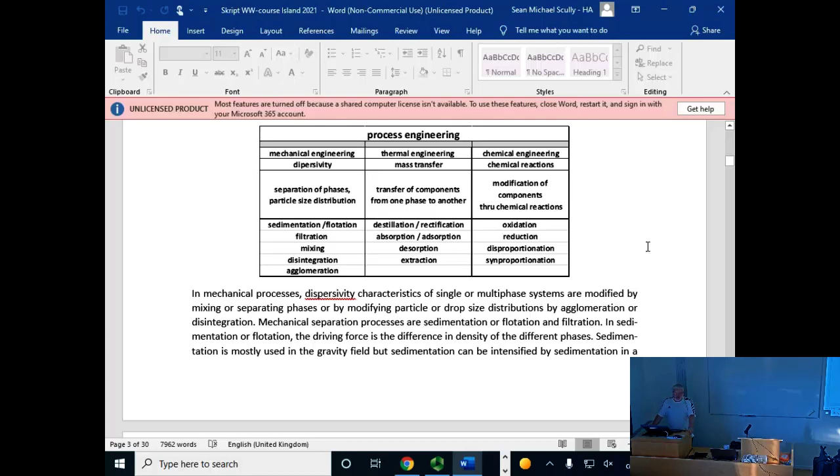Mechanical dispersivity characteristics of single and multi-phase systems are modified by mixing or separating phases, or by modifying particle or drop size distribution by agglomeration or disintegration. Mechanical separation processes are sedimentation or flotation and filtration.

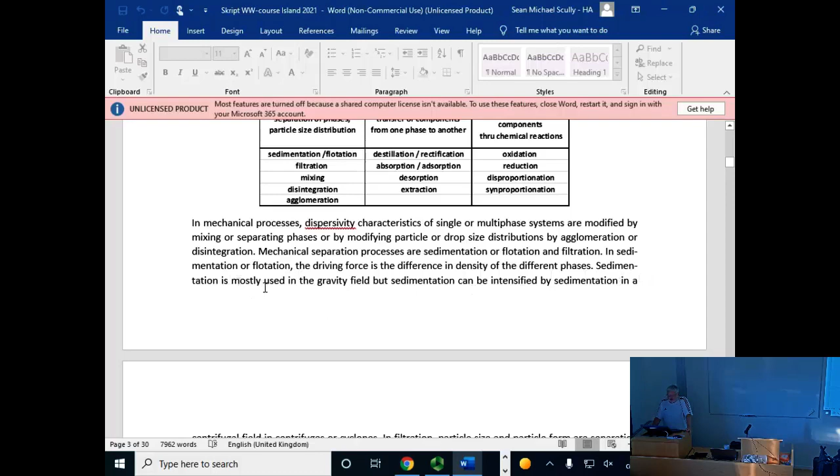In sedimentation or flotation, the driving force is a difference in density of the different phases. This sedimentation is mostly used in the gravity field, but sedimentation can be intensified by sedimentation in a centrifugal field, in centrifuge or cyclones - hydrocyclones or air cyclones, in gas cyclones.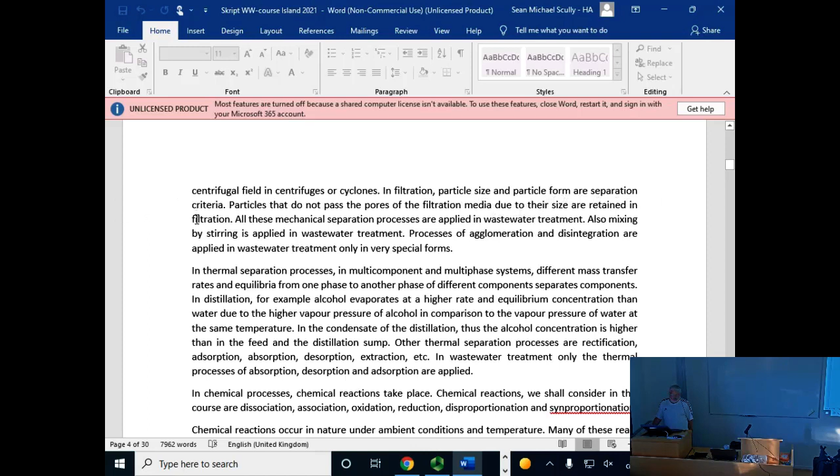In filtration, particle size and particle form are the separation criteria. Separation is always based on a separation criteria. You always got to think, if you use a process, what is the criteria? Can I use the criteria? This is an important part, because if the criteria doesn't match your task, you have to use a different criteria.

I'm going to show you how with this simple thinking you can select the right unit process for the chain of different processes we are going to use in a mechanical separation process in a wastewater treatment plant. This is what we do tomorrow.

Particles that do not pass the pores of a filtration media due to their size are retained in filtration. All these mechanical separation processes are applied in wastewater treatment plant. Also mixing and stirring is applied in wastewater treatment plant.

Processes of agglomeration and disintegration are applied in wastewater treatment plant only in a very special form, and this means flocculation, and that's a very specific task. We're not going to treat that here because that's too complicated for a first course, and mostly there's no theoretical approach.

Just call someone who sells you that stuff to show you how it's done. And if he can't do it, call the next guy. That's normally the procedure how to do it.

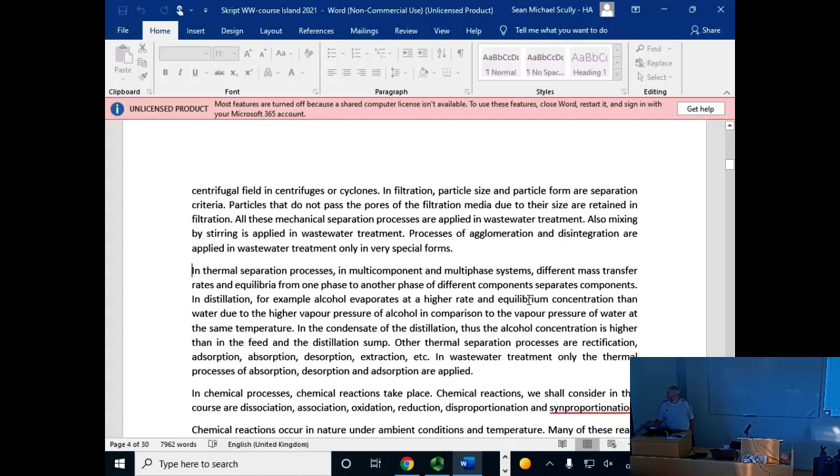In thermal separation processes in multi-component or multi-phase system, different mass transfer rates and the equilibria from one phase to another phase of different components separates components. In distillation, for example, alcohol evaporates at a higher rate and equilibrium concentration than water due to the high vapor pressure of alcohol in comparison to the vapor pressure of water at the same temperature.

In the condensate of the distillation, thus the alcohol concentration is higher than in the feed. In the distillation sump, the water concentration is higher than in the feed.

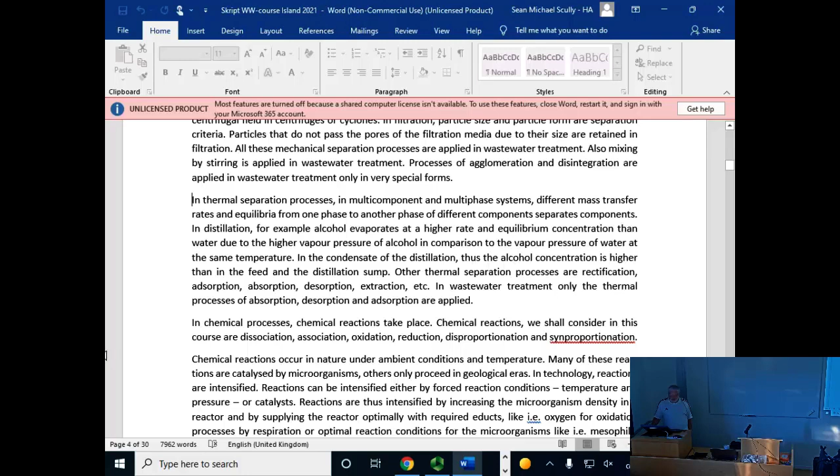Other thermal separation processes are rectification, absorption, adsorption, desorption, extraction, etc. In wastewater treatment, only the thermal processes of absorption, desorption, and adsorption are applied. We are not going to treat those either because it's active carbon, and this is not really too much applied in wastewater - it's rather in groundwater sanitation processes and this kind of stuff.

And chemical processes, chemical reactions take place. Chemical reactions we shall consider in this course are dissociation, association. Here I included them: oxidation, reduction, disproportionation, and synproportionation.

I gave you an example for disproportionation. Synproportionation, for example, is the Anammox process. In the Anammox process, we combine ammonia and nitrite. Ammonia, we have the N with -3, and nitrite with +3, and they react to elementary nitrogen and water.

Chemical reactions occur in nature under ambient conditions and temperature. Many of the reactions are catalyzed by microorganisms. Others only proceed in geological eras. In technology, reactions are intensified, either by forced reaction conditions, temperature and pressure, or catalysts. Reactions are thus intensified by increasing the microorganism density in a reactor or by supplying the reactor optimally with required educts, like oxygen for oxidation processes by respiration, and optimal reactor conditions for the microorganisms, like mesophilic temperatures for anaerobic digestion for converting organic waste or wastewater contaminants into biogas.

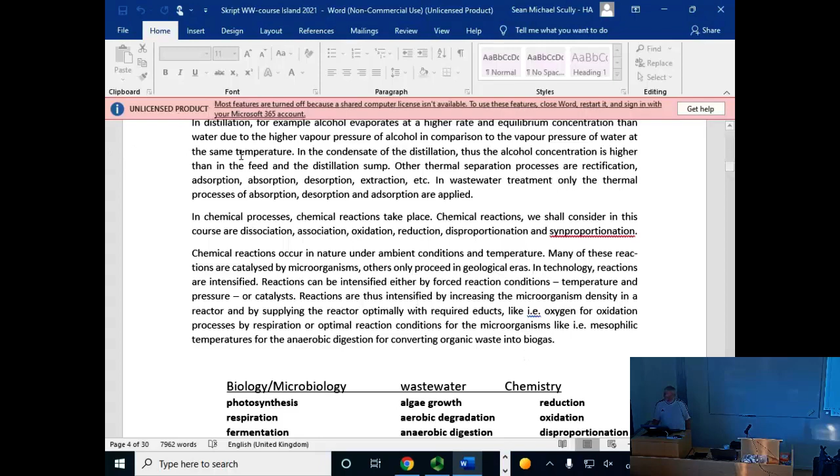This is just to organize a little bit the chemical process engineering. So for the same process, we have different words in biology, microbiology, in wastewater treatment, and chemistry. In microbiology, we talk about photosynthesis. Most of you know what it is. In wastewater, the only application of photosynthesis is algae growth. In chemistry, that's reduction, because the process of reduction is always coupled with oxidation, obviously, but the reduction is the process we look at. That's reducing carbon dioxide to sugars and comparable organic substances. Respiration is just the reverse reaction.

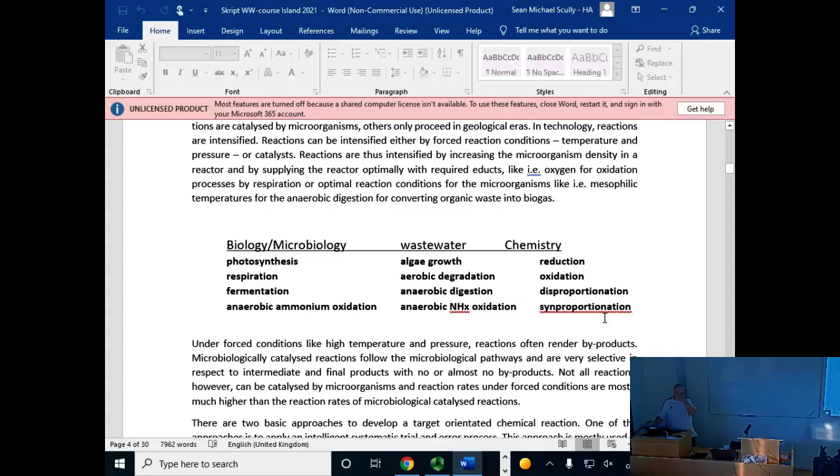In wastewater, we talk about aerobic degradation for that, and in chemistry it's oxidation. For fermentation, in microbiology we call it in wastewater treatment anaerobic digestion, and in chemistry it's a disproportionation. The same is true for the anaerobic ammonia oxidation, an Anammox process - that's an anaerobic ammonia oxidation. It's the same here in wastewater treatment, but it's a synproportionation from a chemical view.

Under forced conditions, high temperature and pressure reactions often render byproducts. This is a main difference, and this is why in chemistry, first of all, producing forced reaction conditions is costly sometimes - that's why you have to have a higher value for your product. And the bad thing, if you want to do it environmentally sound, is all those byproducts. Microbiology catalyzed reactions follow the microbiological pathways and are really very selective with respect to intermediate and final products.

There's almost no byproducts. This is the strength of biotechnology, biochemistry. Not all reactions, however, can be catalyzed by microorganisms. The reaction rates under forced conditions are mostly much higher than the reaction rates under microbiologically catalyzed reactions. That's the reason why for a long time microbiology or biotechnology didn't play a role, because nobody was interested in the waste or in the effluents that was only dumped. And that was it until the 1970s, when environmental consciousness started, and then it was only money and price. And there, of course, since plants were pretty expensive and energy was cheap, it was always the forced reaction conditions that made the race in feasibility. Only if people wanted to eat it, they didn't want to have tar in their food, and that was produced microbiologically in the food industry. Yeah, that's basically the truth.

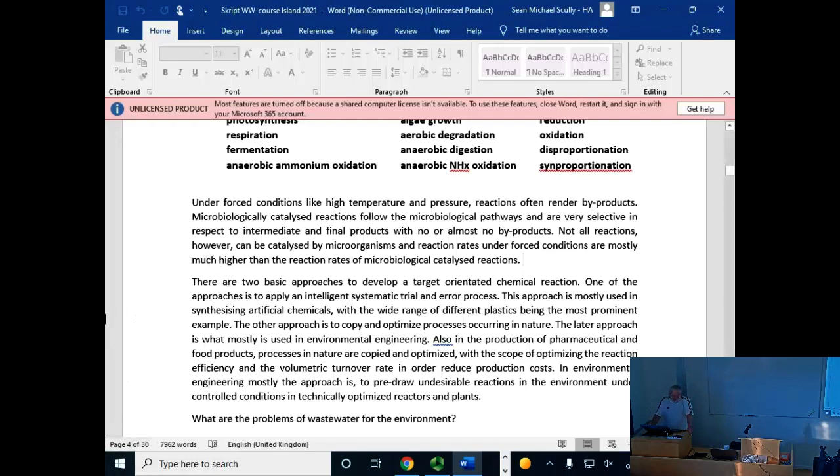So there are two basic approaches to develop a target-orientated chemical reaction, and this is now very important. One of the approaches is to apply an intelligent, systematic trial and error process. This approach is mostly used in synthesizing artificial chemicals, with a wide range of different plastics being the most prominent example, because chemists more or less know about certain reaction principles of organic chemistry. Then they go into their lab and try to screw around with different inputs and different stoichiometric relations, different pH, different temperature, different pressures, different catalysts, and try to get the product they want to have. By just trial and error, they find a process. When they have the process, they invite the chemical engineers and say, look what I've done in my laboratory, what wonders I have thought up, and now you do that in big. This is how chemistry and chemical engineering work together in 90% of the chemical companies.

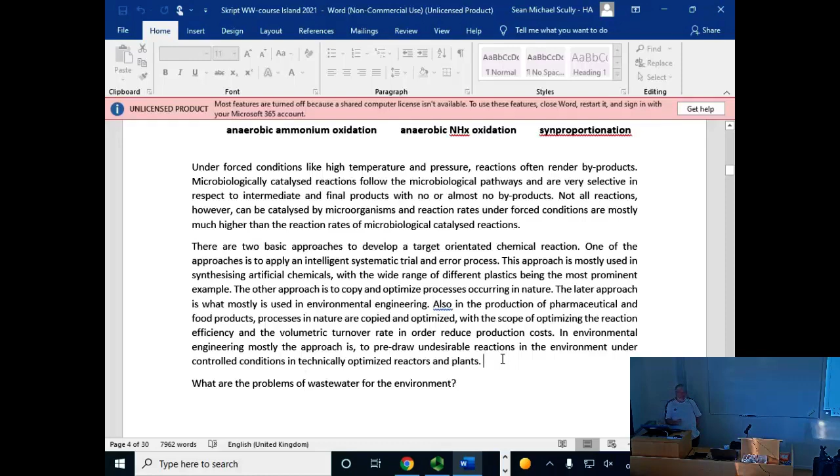The other approach is to copy and optimize processes occurring in nature. Also nothing new - this has basically been done for many years in history, copying nature in the food industry, pharmaceutical industry, and this is also the mostly used, or almost exclusively used, approach in environmental engineering. Also in the production of pharmaceutical and food products, processes in nature are copied and optimized with the scope of optimizing reaction efficiency, the degree of conversion, and the volumetric turnover rate, in order to reduce production costs. In environmental engineering, mostly the approach is to reproduce undesirable reactions occurring in the environment under controlled conditions in technically optimized reactors and plants. This is what we do in wastewater engineering. Okay.

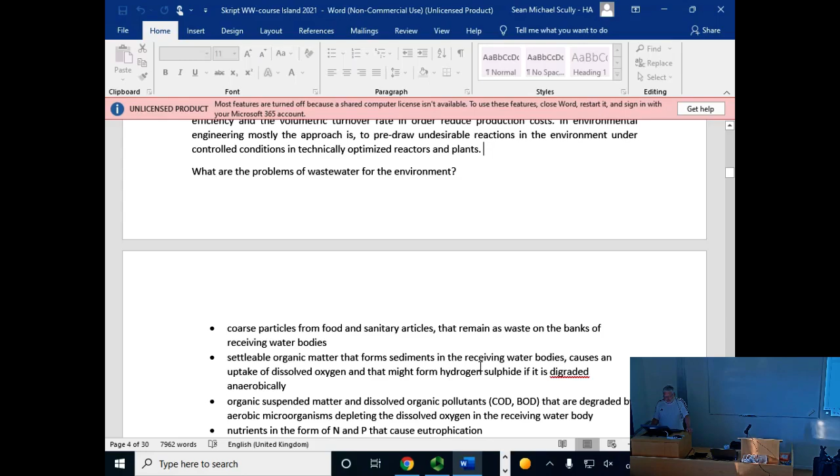And I think this is a good point to close here, because then we start to get into the wastewater treatment plant. So I'll leave you thinking a little about the problems of wastewater to the environment. What do we treat there? What, why, and how?

It's almost 7 o'clock. In Germany it's 5 o'clock here. Sorry. Good? Yeah, I think it's a good stopping point. That's the way I look at it.

In the '70s, it was the Clean Air and Water Act, signing that into law. Yeah, excellent.

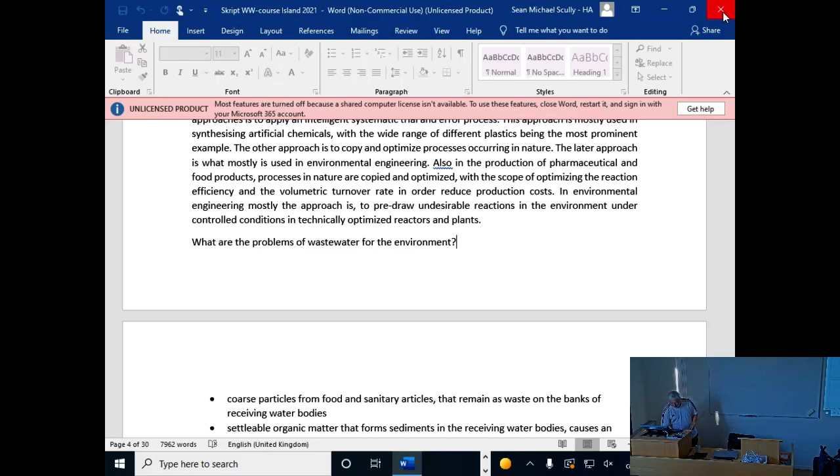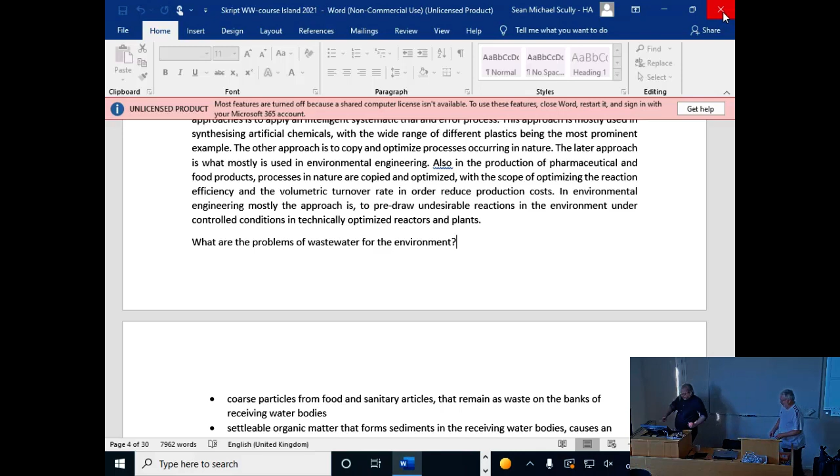So you got to that point? Well, I had students, I have a master's course, they work on it like a project. One of the projects is to make three conveyors, band conveyors, for coal to a thermoelectrical plant. It's a little bit inspired by, actually a copy of, the coal transport from the harbor of Rostock to the coal thermoelectrical plant. They have to reconstruct that. And one of the groups, in one semester, they handed in a CAD file that you can run, and you can go into the motor, and everything is turning, the band's running, the motor, everything is running. I don't know how this kid did that. That's okay, he has a job, he works on this and now, after that, he went back to that company where he worked as a student, always in technical drawing. But he's so quick at it.